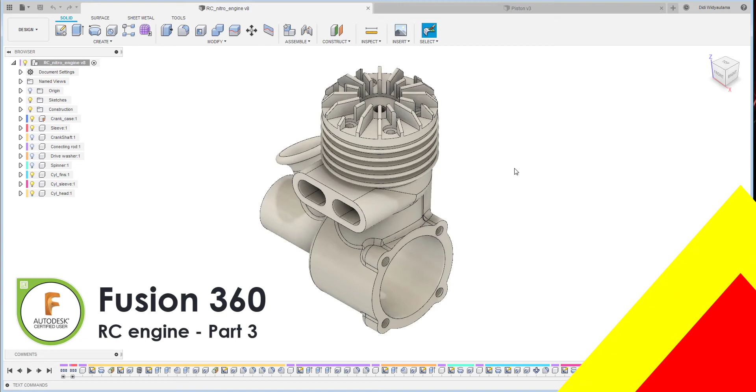Okay, today we are going to continue to finish this RC engine. Right now we are going to assemble and create some of the parts left over, and we also want to insert the piston and assemble it in here. Okay, let's get started.

As we can see, we have so many parts in here which we are going to take and assemble. But before that, make sure that this crankcase has the pin on it. This one is basically a grounded component, and then I would like to organize all these three here.

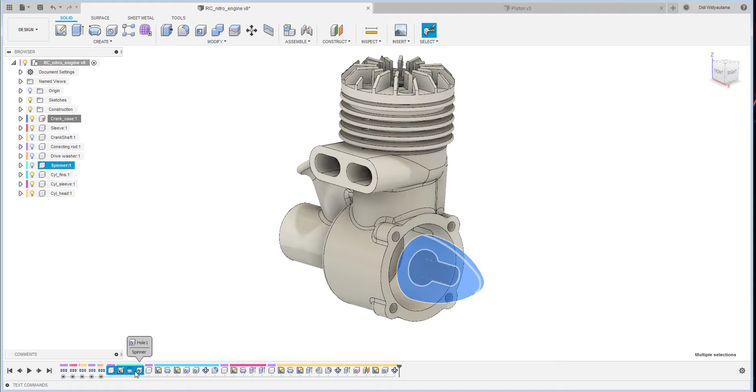In order to make it easier to organize, I create a group. This one I will rename. So basically you just rename and group everything in the timeline down below to make it more organized, and then more accessible when we want to edit a feature in the future.

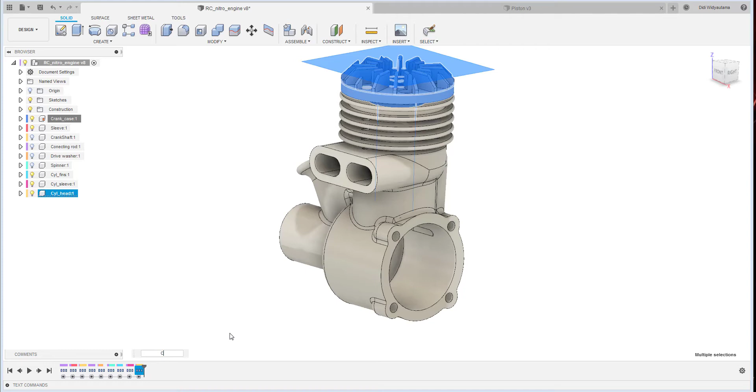From here to here is a cylinder head. Okay, we've done all the renaming, and now we continue.

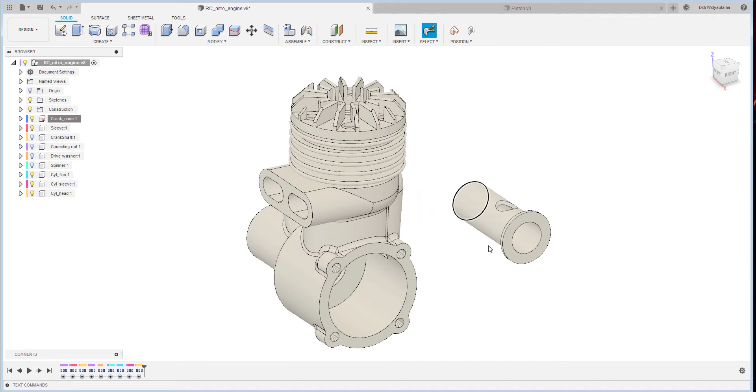Because this crankcase part has a pin on it, it cannot move. But for the sleeve here, if you drag it, it will move over there. And if you want to put it back, you just click revert. Or this one - see, all these components we haven't assembled over there.

So we would like to make the as-built joint. I will create the as-built joint, and select the component here and here. This time it's rigid. After I do the assembly, we did the as-built, so it cannot be moved.

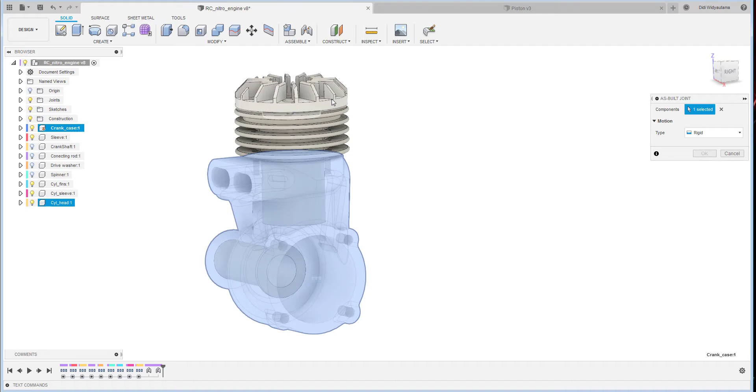And then I will continue as-built joining this one and this one. And also as-built join this one with this one. And then also the inside assembly, as-built join this one and this one.

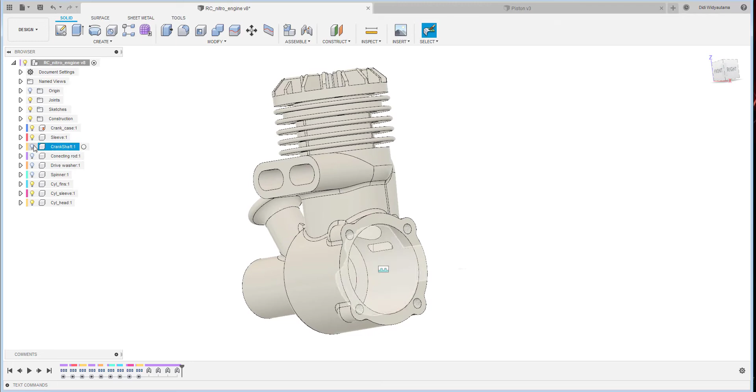Okay, so all is done for the assembly, and then I'm going to open the piston. But before that, I would like to assemble this one. I use the joint command, and select the motion type as revolute, because basically this can be revolved upon this sleeve.

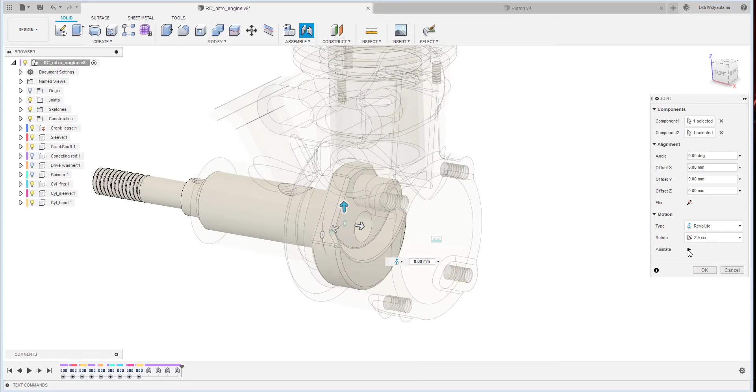Okay, like that. But if it looks not appropriate, you can flip it. And you can click animate to show how it's doing. Then I click OK. So it's over there, this crankshaft, and then we continue with the connecting rod over there.

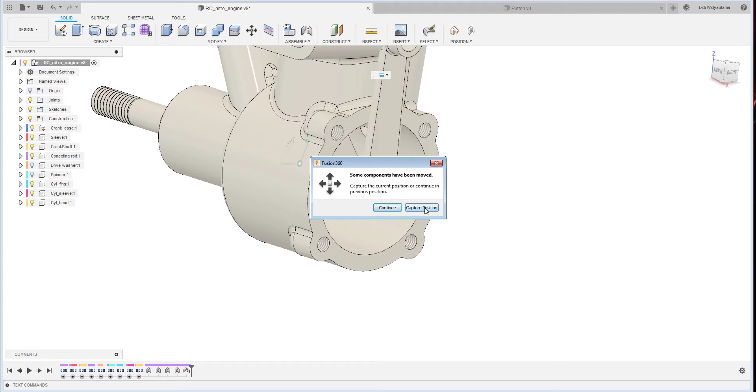So I'd like to assemble this connecting rod, create a joint - joint, and some have been moved. Capture position, and then I'm going to use cylindrical, because this type, when put here, lets us slide over there and also rotate. So I choose the midpoint of the cylinder.

To select it, I just move my mouse here, and press the control key to select between these three points, and then I'll choose the center one as the reference point, and also that one.

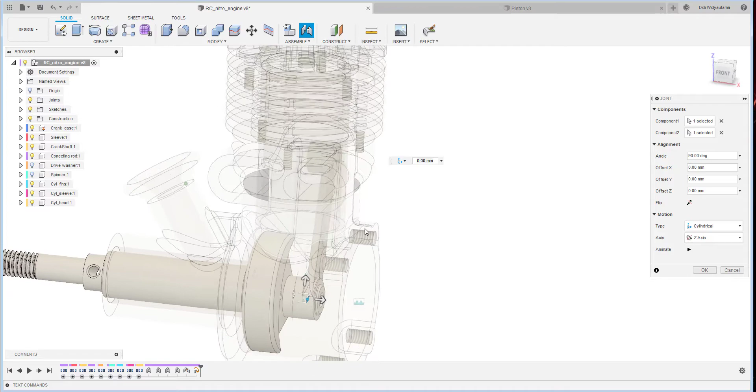And then I will do the flip over there, so it will be - yeah, maybe it's like sliding over there as the animation shows the movement. Okay, that's okay. And then I will bring up the piston.

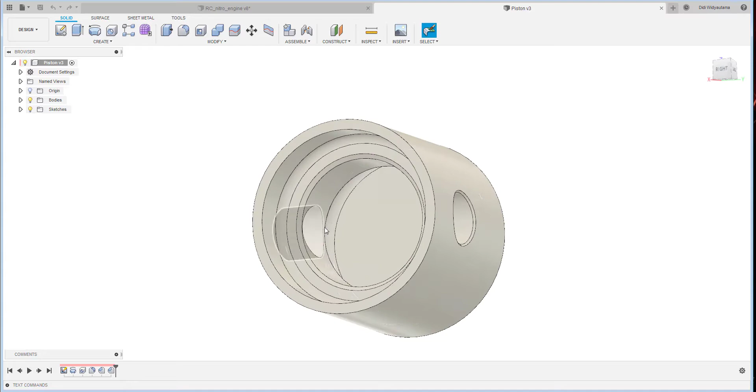This is the piston that I previously created, but I want to make this a joint origin, because basically if you select with joint assemble, it cannot work since there is no reference in the midpoint of this one.

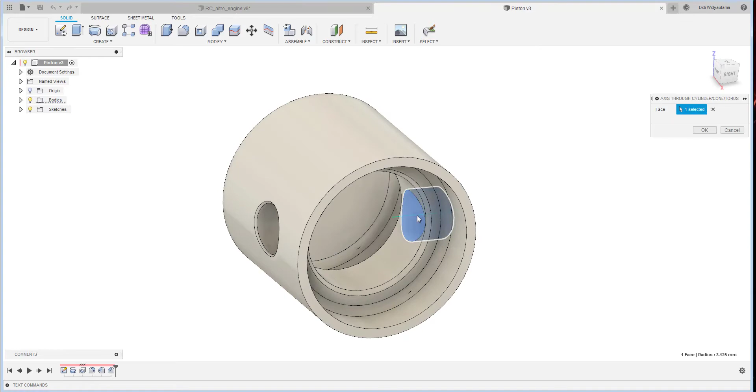So I create an axis here through the cylinder, and if you see there is an origin, I would like to create the point through point, edge and plane.

I just select this one and then this one, so they will create a point between this center line and this plane. I turn off - and then I also turn off the axis, and then I create the joint origin here. Just click there.

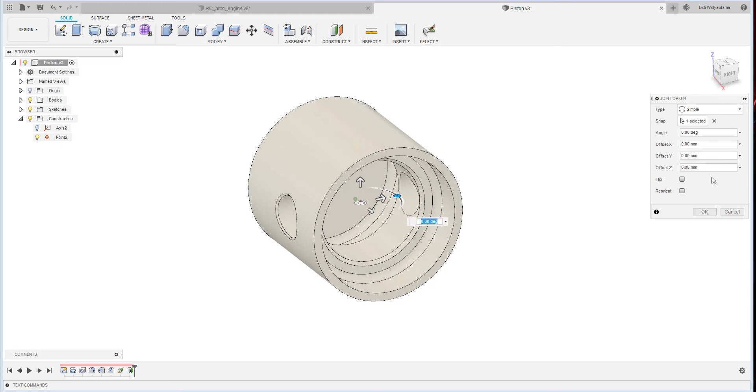Then I have to rotate this joint - reorient. Which one is the z-axis? This one is... no, I think this one is the z-axis.

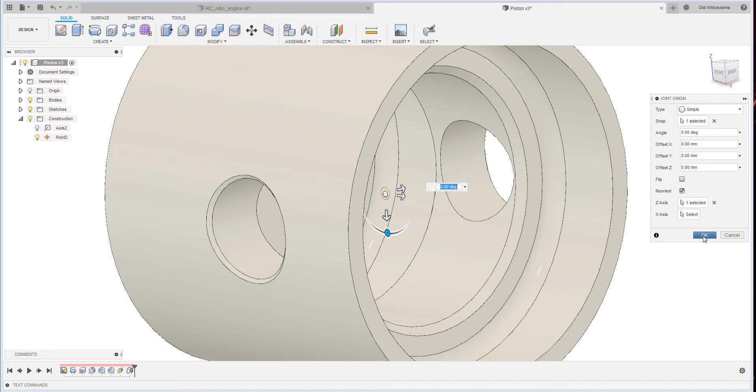Okay, so I need to reorient the joint origin. And then as I finish, I click OK, so that face, the small face, is perpendicular to this axis of the cylinder. And then I click save to make sure these changes are saved.

And then from this one, I open up my piston and then right click from here.

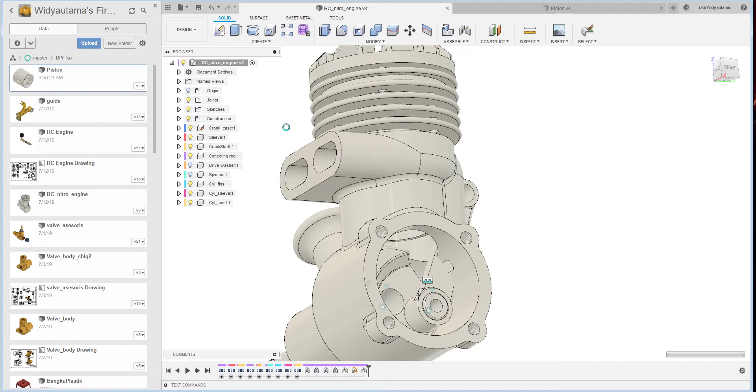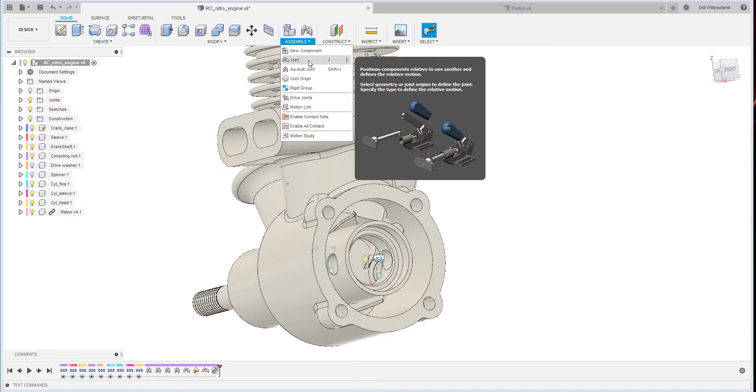Right click and then insert into current design. This is basically just inserting that piston into the current design. See, there is a piston over there, we insert, but there is an icon, a chain, that indicates this piston is linked to this file. I just click OK, and then I create a joint assembly with the cylindrical as well.

I put it from here, this cylinder, to the sleeve over there. To the sleeve. So basically they can move like that.

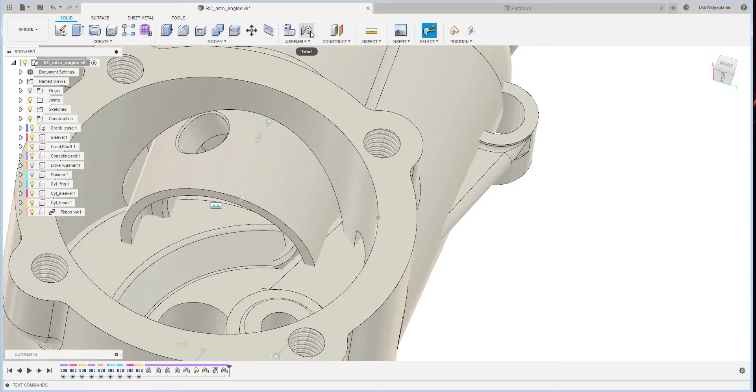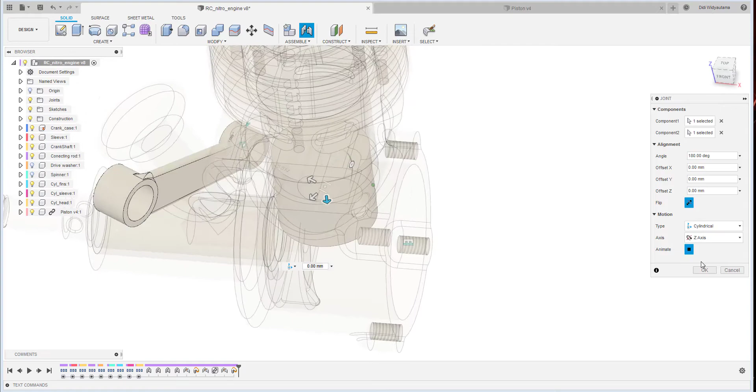Just click OK. I still can move it, but I would like to join this piston rod with the cylinder, with the piston. So I create a joint once again. Make sure to use the control to select the center, and then I just click the joint origin. It seems that this one is at the correct orientation, so I just click OK.

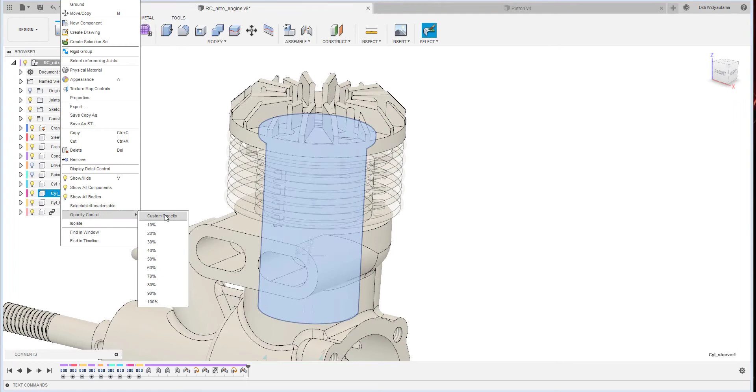So basically, if we see here, if I put the cylinder fin in opacity, and then the cylinder sleeve, I put the opacity. I click right click and then put all the opacity, and then if I move it, the piston, the crankshaft rotating, so it will rotate and move according to this position.

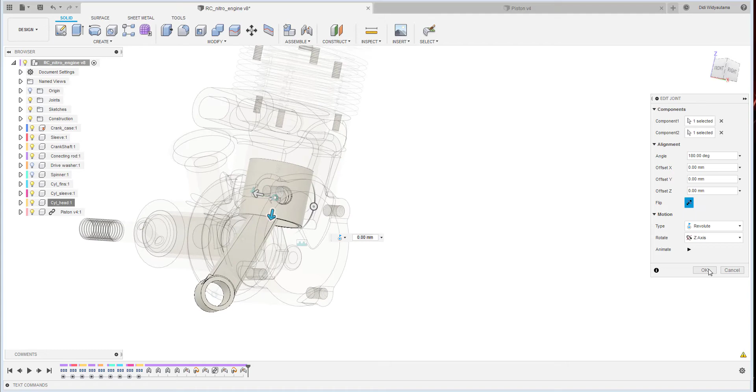But this one also can move because the joint type here, I use the cylindrical. If I put it in the revolute, this one will result in conflict. Oh no, yeah, because of this I wanted to put it in the center.

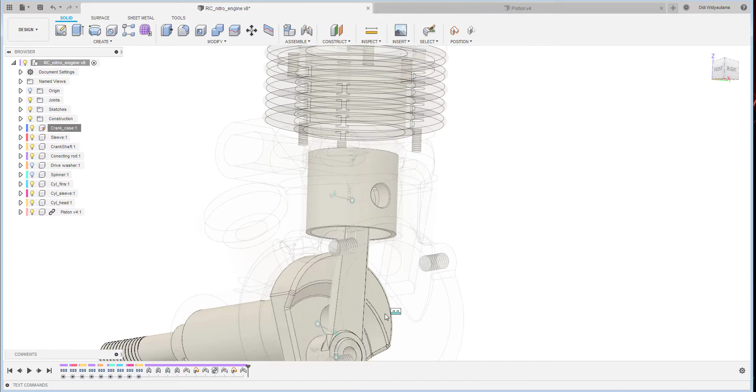So if we give this one transparent as well, so we can see that, yeah, we can see that this particular cylinder is at the center of this one.

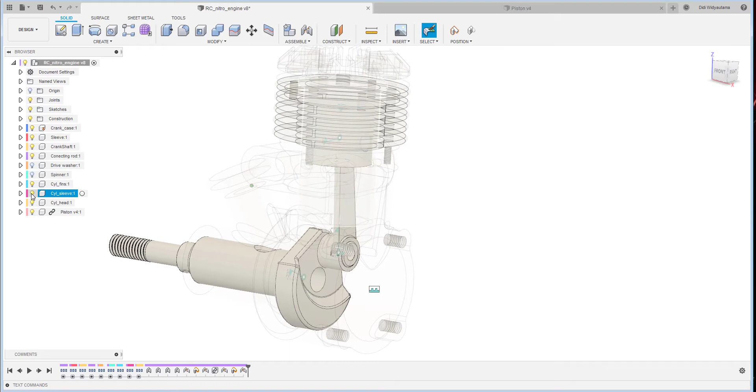Now we continue to create the piston pin over there. I like to turn off the sleeve, cylinder head and cylinder fin, and also the crankcase, to get a clearer view. And then I create a new component, and then we say piston pin.

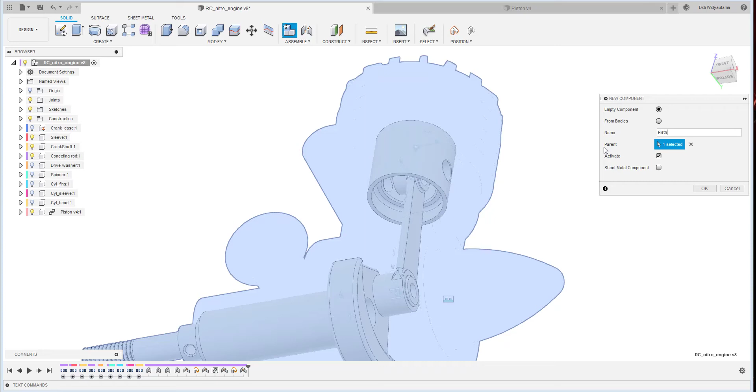Let's create a new component over there, and then I create a sketch, which I like to do on this particular face here. So I create a capture position, and then I just project this cylinder, which is the inner diameter of the cylinder here.

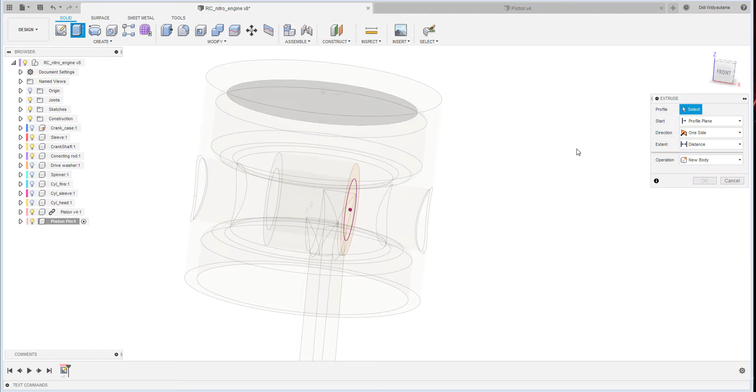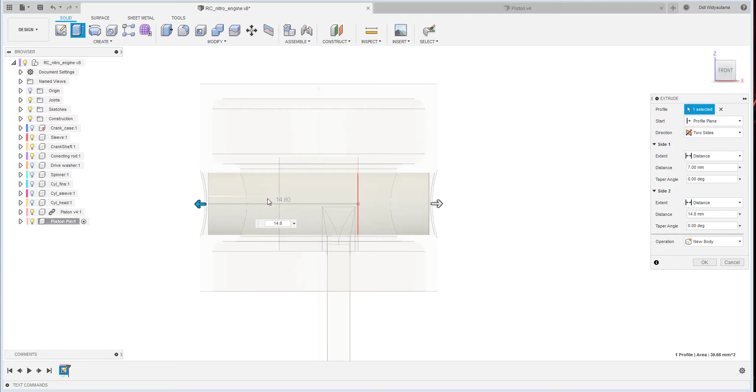And then I just finish sketch and then extrude this profile to the two sides, and then I drag this one maybe from here. I think 7 will be good, and then to the other side, 15, no, I think 14.8 probably. Yeah, it looks like it's the same.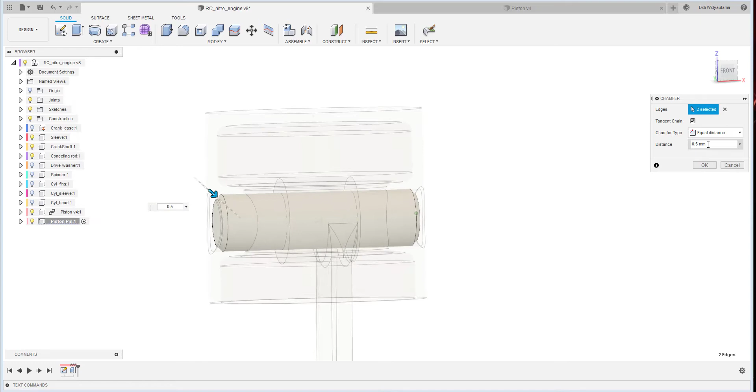And then I just click OK for the new body, so it will create this kind of shape. And then if I like to put the chamfer over here, and also over there, 0.5, no, maybe 0.25 is a good choice. Yeah, I think it's finished for the piston pin.

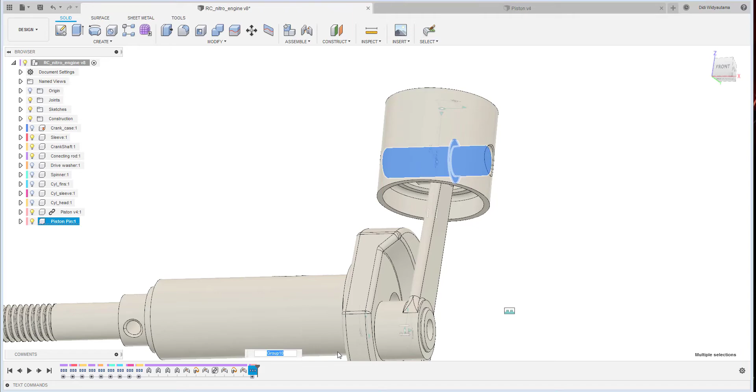It's very easy and quick to create within the assembly, so we don't have to create all this assembly together. And as I remember, I also want to - I think this one is not necessary, so I will delete the positioner, and then I just want to make this one as a group, to make it easier. Piston pin.

And then the last one, I would like to show how to create this bolted connection for this one.

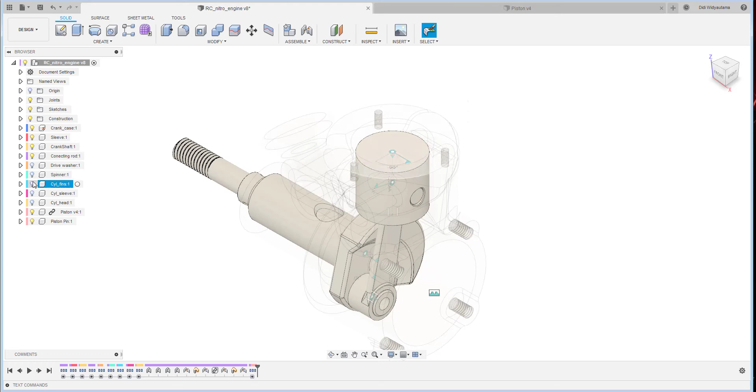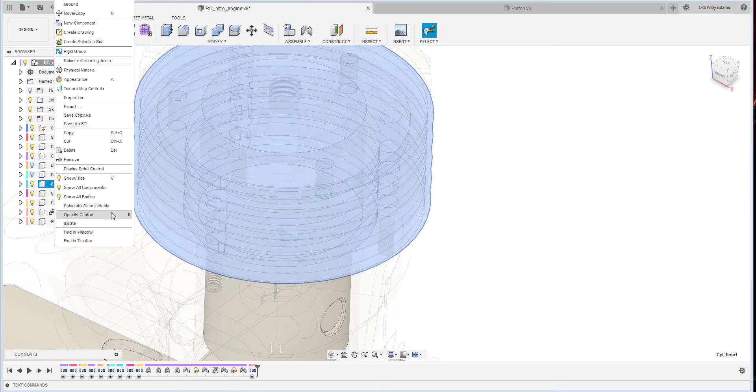We continue to create the bolted connection between these fins and cylinder head. First of all, I would like to measure how much the length of this bolted connection is. So maybe I will create with opacity maybe 18%, and then this one, this cylinder head is 18%, and also the crankcase I will make it 100%.

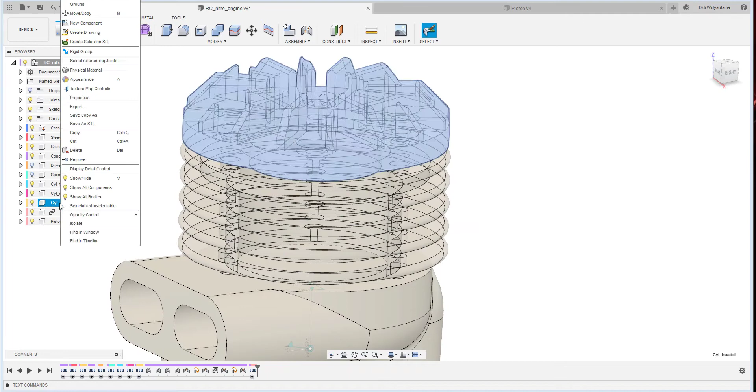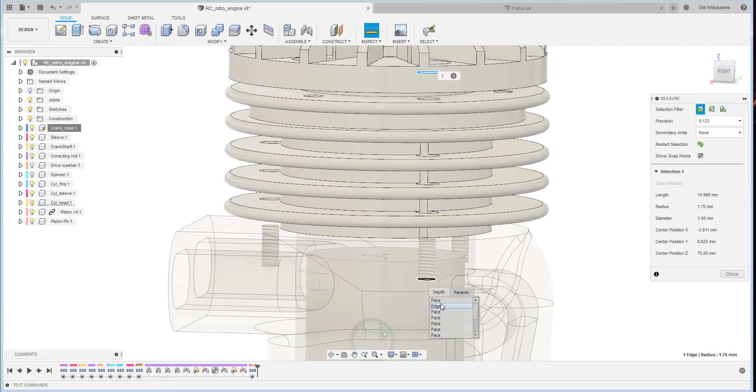Okay, so still confusing, so maybe 100%, this fin also 100%. I will measure this here to the position here, so it's 10, and then this one from here to the inside of the diameter, that one. So from here to the... I hold it, yeah, it's that one. So it's 31 and 10.

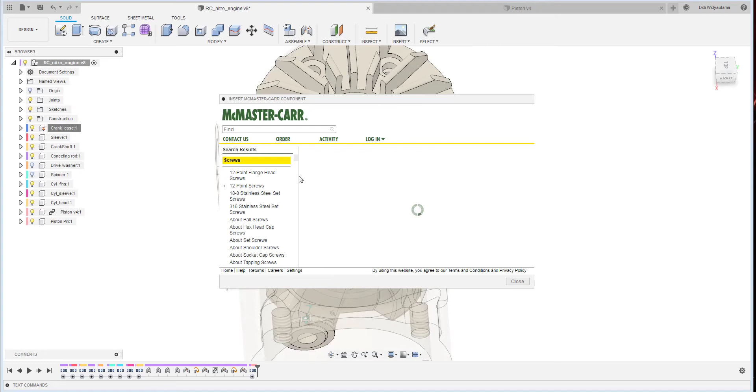So I will search for the bolt. This one also has a diameter of 3.5. I will insert the McMaster-Carr, then choose screw and bolt, and use the metric, socket head, and M3.5, then use 10 for the length.

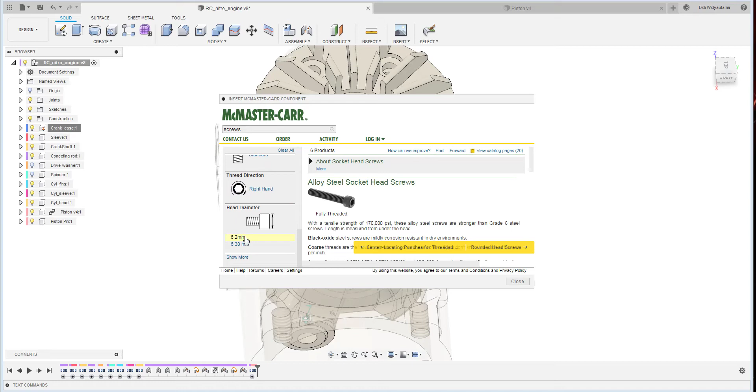And then, yeah, we use this one metric. Standard. Head diameter using this one. And then there's a product detail over there, and from here you can select the 3D step and click save.

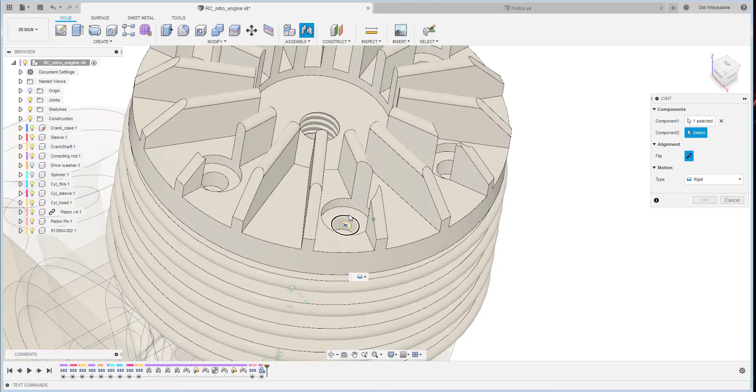Okay, they will automatically go inside Fusion, and then I just click OK, and then I do the assemble using the rigid because it's a bolted connection. So remember to press control, click that one, and then I put it over there. Okay, and then I flip. Make sure it's at the right position. Okay, then I just click OK. And for the other instances, I just...

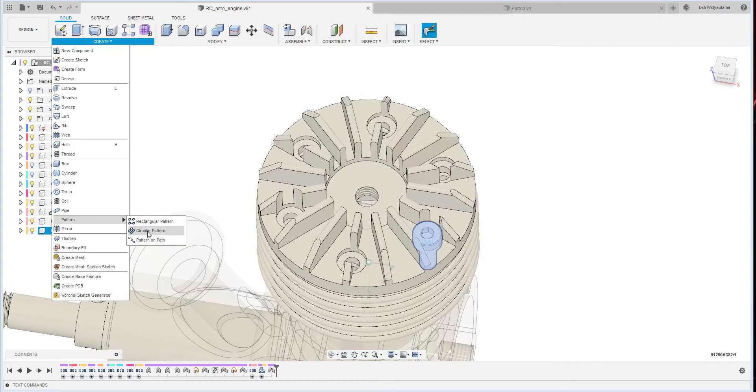Create the component using the circular pattern for this component. Make sure choose the component, and then the object is already selected, the axis. Maybe I use this one as the axis, and then the quantity is 3.

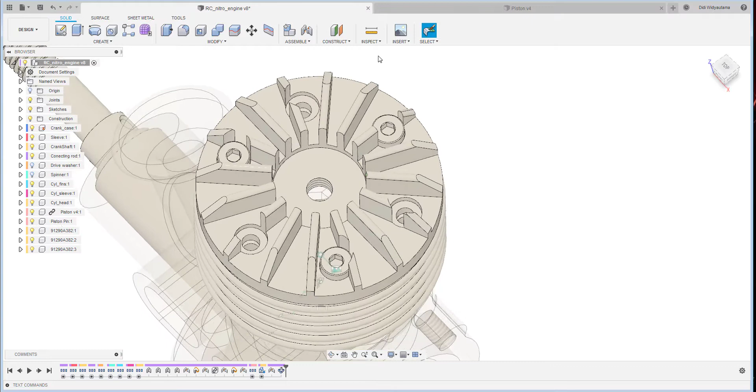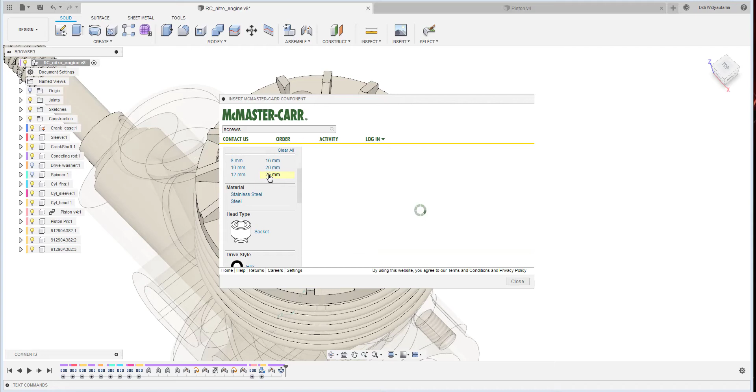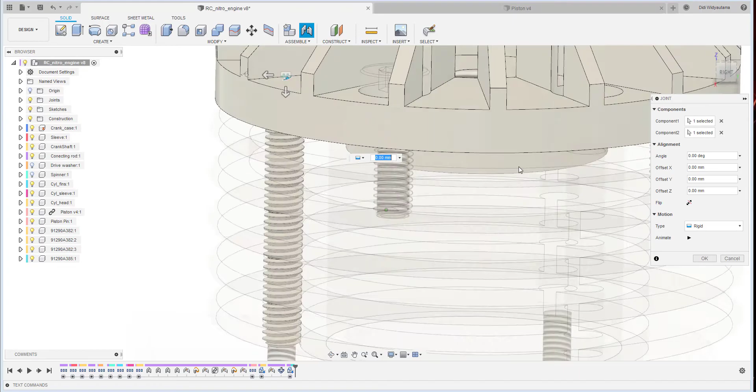Okay, just click OK, and then continue with the joint. Yeah, that one to this one. Okay, I flip. Okay, it seems that this particular bolt cannot reach. Maybe it's not a standard, so I will click cancel.

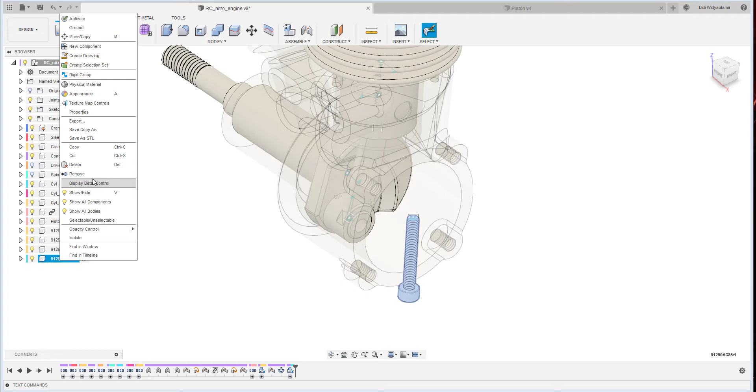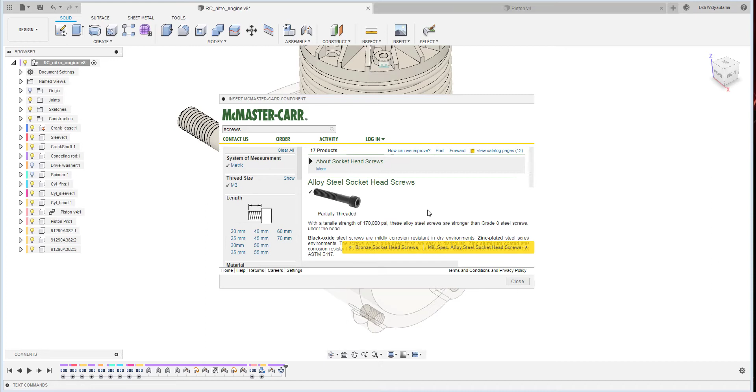And okay, because this one is not suitable, I just delete it. Okay, delete that one, and I reinsert. I look for another type of screw head, socket head, and then alloy. Okay, this time I choose the fully partially threaded. Okay, and then use the metric. I use M3. Now this one, there is a length which is suitable, which is 30. Okay, and then the head diameter is a bit larger.

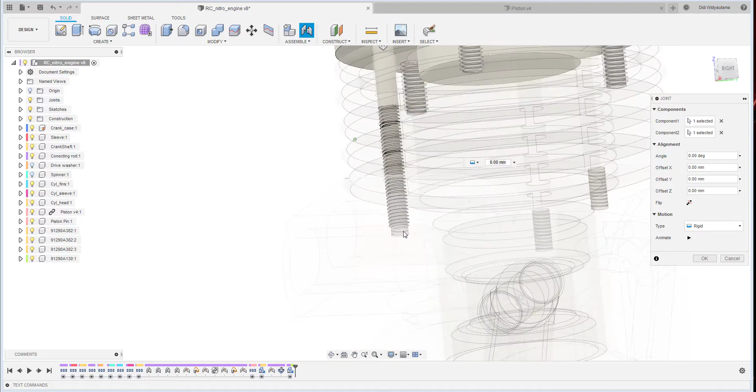Okay, the black one. Okay, Pro detail, and then I save. Okay, finish. Okay, now I insert this one, that one, to the head over here. Just flip. Yeah, okay, looks like now it's a good correct length, but it's a little bit downsized, which is M3. We can change the size of the hole.

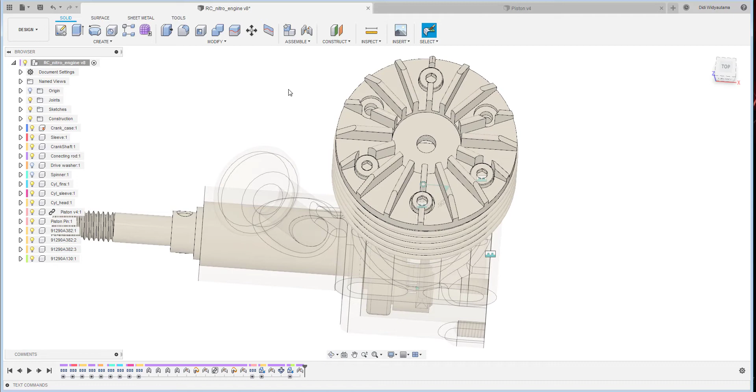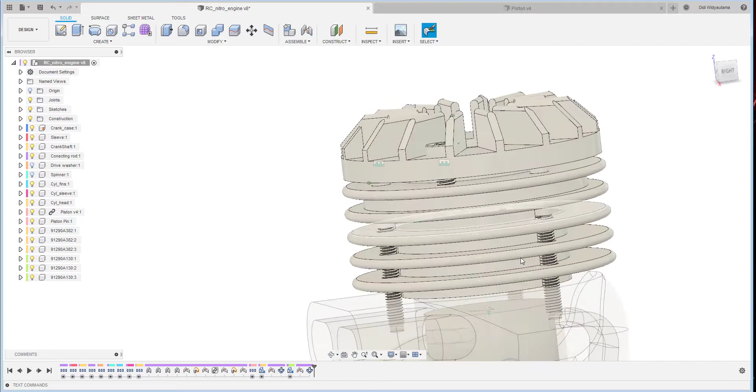It's not necessarily important, we just can review, and then I will continue with the pattern, circle pattern. So basically just the component, this is the component, and then this is the axis. Number of instances is 3. Okay, it's finished. Yeah, I think this one is a correct size, so it's not necessary to edit.

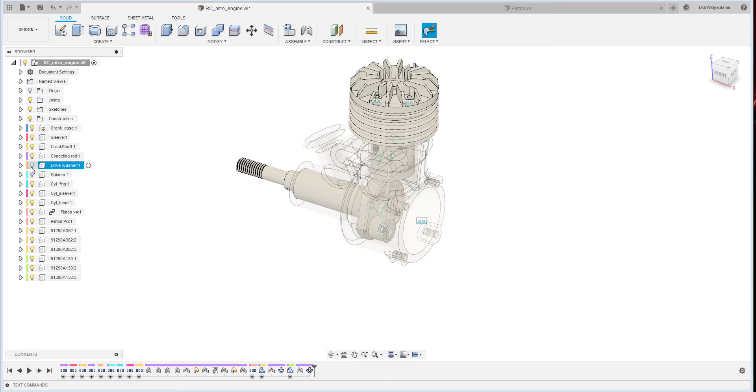Okay, now we continue to the last part, but prior to the last part, I'd like to open up this one, the drive washer. Okay, wait, spinner, drive washer. Okay, drive washer should be put over there. It's just quick and easy.

Just put this one to that one. Okay, and then flip it up. Okay, and then there should be a drive washer. Okay, I put the opacity to 30%, and then we would like to have this, the spinner.

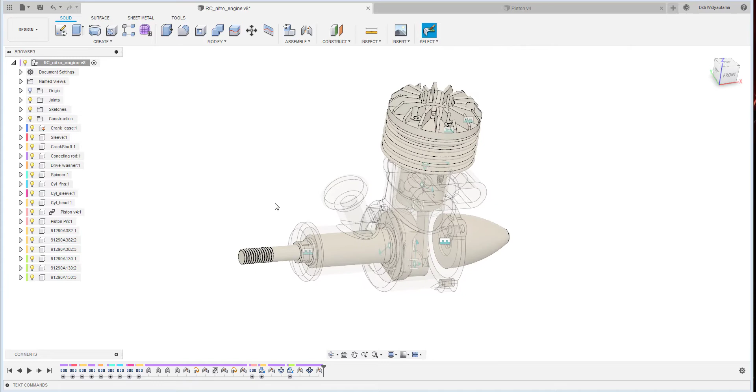Okay, over there. Before I put the spinner, I'd like to address this propeller blade, and I would like to address creating this propeller in another video, because I think this propeller is quite special in its creation, how to create the propeller.

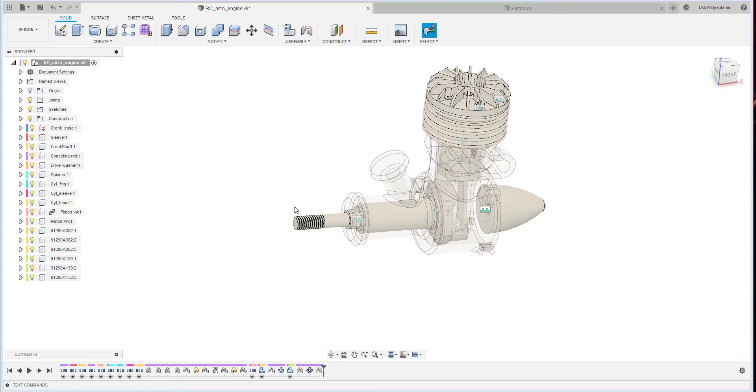Okay, we continue to the part here, which is the back cover, but this time I don't want to create this back cover because you already know the workflow.

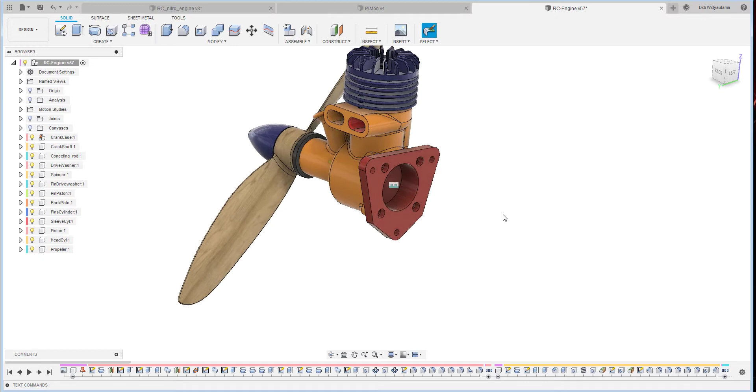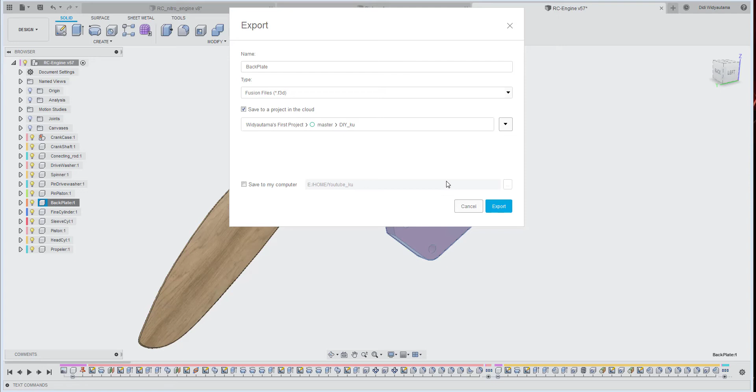In this scenario, if I already have a part that comes from another file, we need to extract this component and put it into another assembly. First, this is the component, the back plate. I right click, then select export. I name it back plate, make sure it's a Fusion file, and save to the project in the cloud rather than my computer, then click export.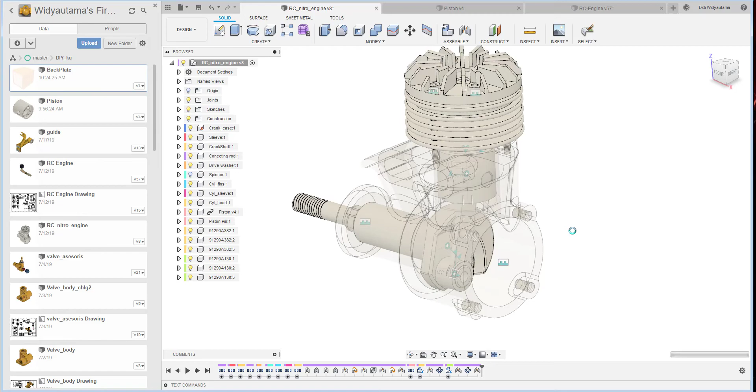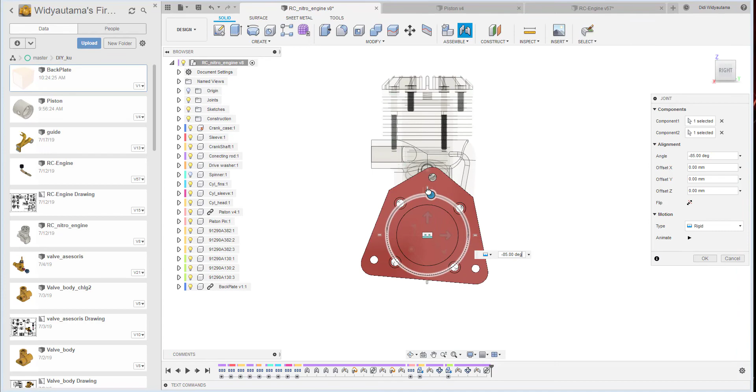I open up this engine and see there is a back plate being created, so I click insert into current design, just as easy as that. Then I click OK. I flip it over here, then make sure this is rotated 85 degrees. So that one is finally extracted from the other part or other file.

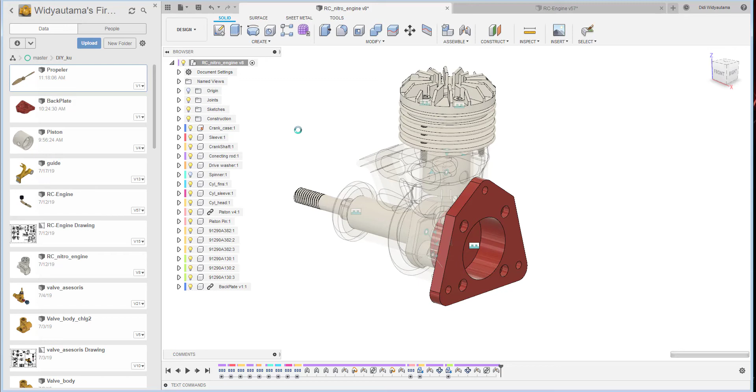Now we continue to insert the propeller here. I already have this propeller part. Right click, insert into the current design, click OK. Then I put this propeller, click continue, and attach it to the shaft over here.

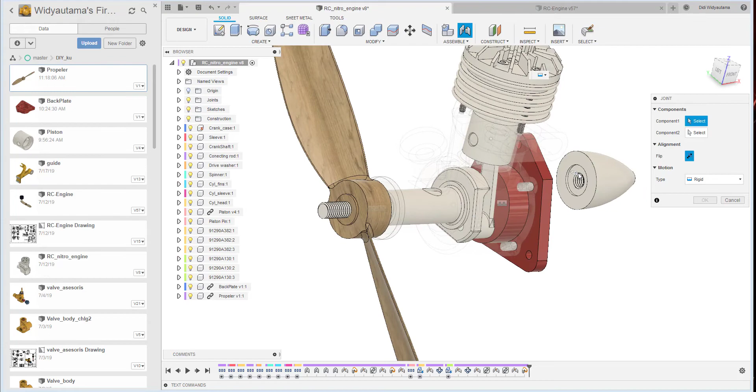Click OK, and then continue with the spinner here. Capture position, and then align this face's center point to the propeller's center. Put it rigid. This one is already finished, and for the crankcase I put the opacity to 100%.

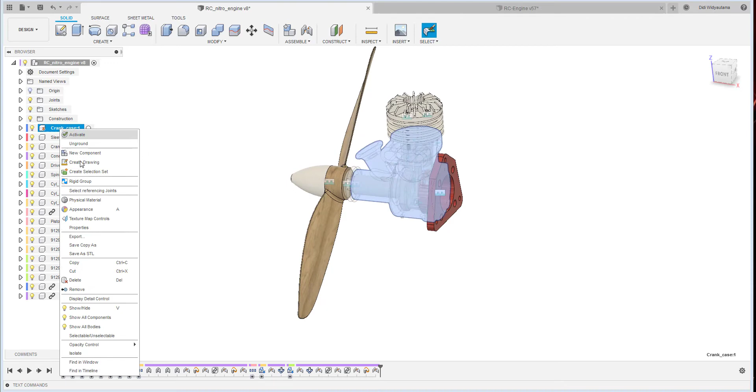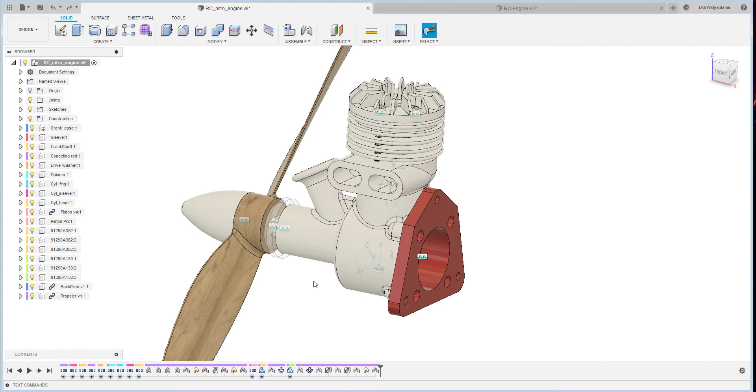Right now we are going to evaluate this propeller. If we drag this, you can see something moving inside, but we cannot see it clearly. So if I want to create a section for this inspection, I click section analysis, then select the face, and drag it to the particular position I want.

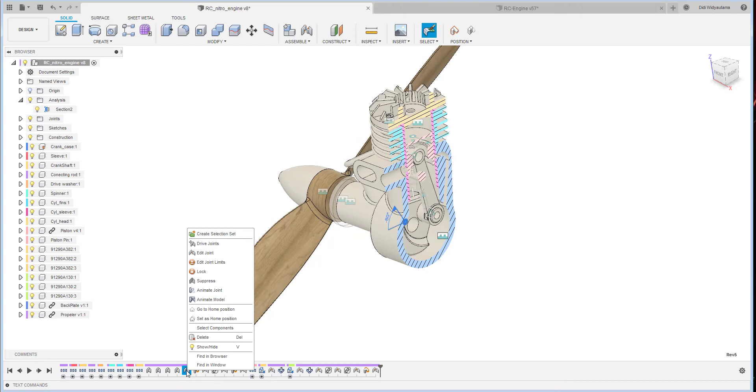Click OK, and you can see there is a crankshaft over here. If you want to do the animation, simply click the joint, then right click and we can animate the model. This will show us the animation of the moving object, and you can hit escape to end the animation.

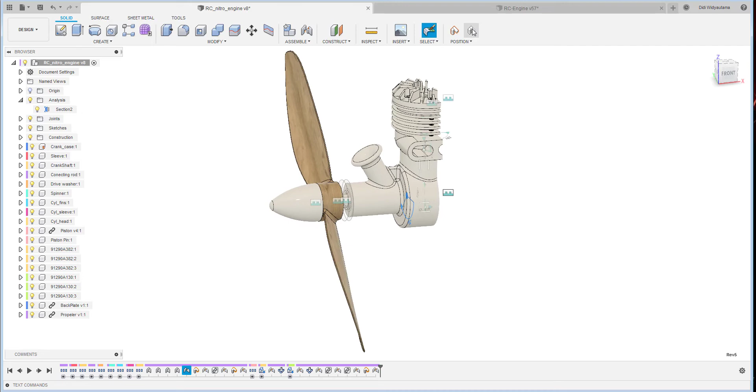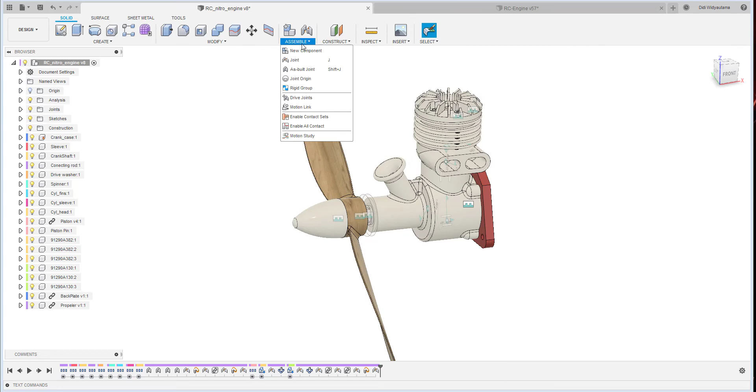This one is for the revolute. If you want to turn off the section analysis, just turn it off. Also if I want to create the animation, oh sorry, this should be here. There's a motion study here, so basically motion study lets us control more of this.

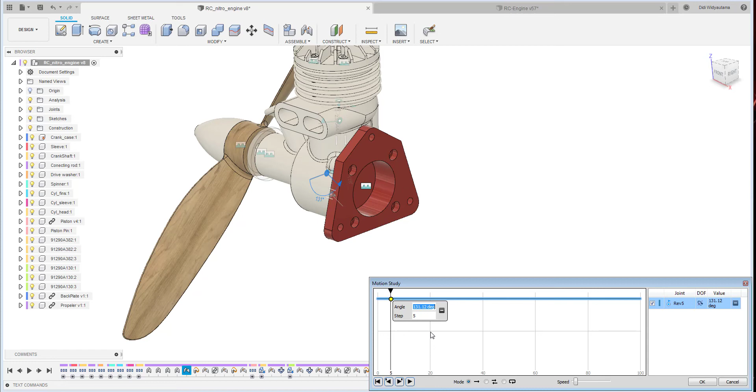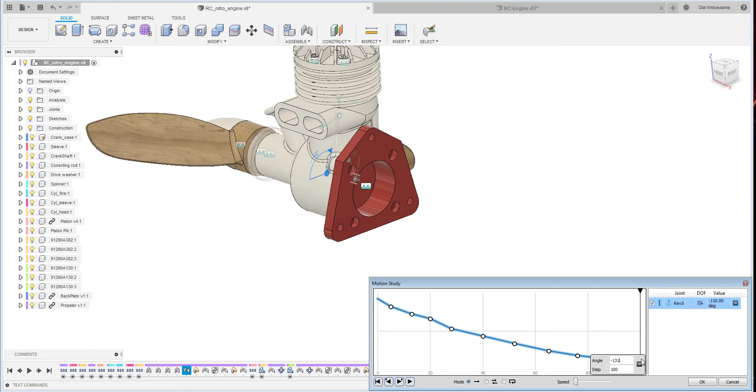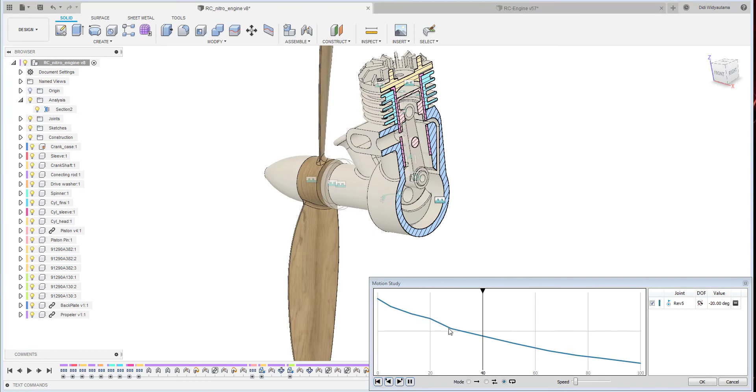So, back to the original. If you put this into the playing loop and then play, the assembly will be animated, but this time we can control the speed. We can also control the loop, or move it back and forth, or just in one direction.